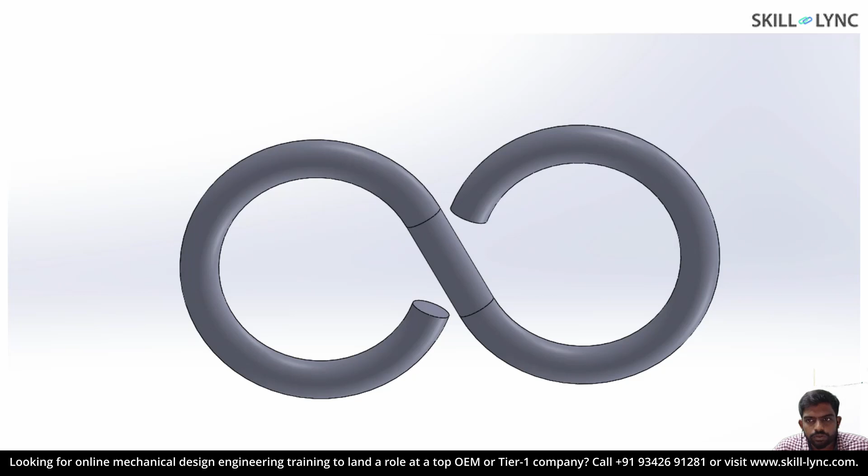So to perform the analysis, I have created a model for the S-hook, let's open it up in a separate window. Here in this model, in real life we fix this particular portion of the hook and bend the other section to enable the connecting member to slide into this part. This particular portion of the member is bent and rebent to accommodate the connecting member.

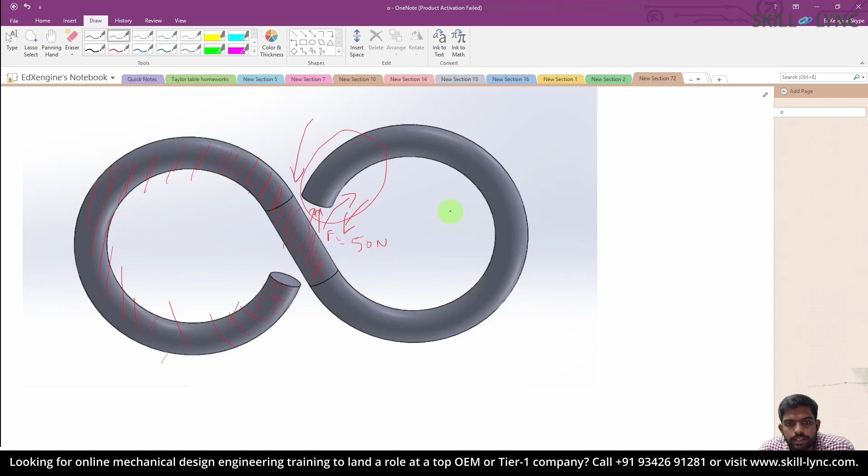We are going to apply the same load here, that is, I'm going to fix this region by a fixed geometry constraint, and after doing that I'm going to subject this particular portion of the member to a force of 50 newtons, apply the load, and predict the life of this part when subjected to 1500 cycles. So let's go back to the presentation.

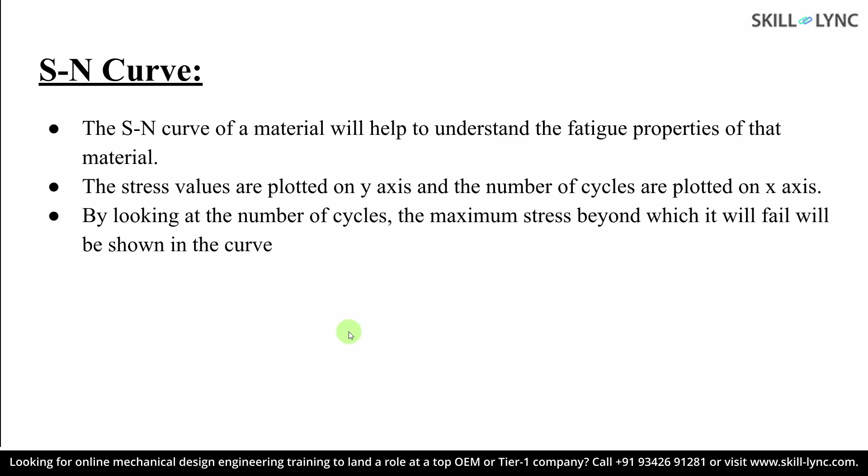Before we proceed with the fatigue analysis, let us understand the use of the SN curve in a fatigue analysis. The SN curve for any material gives us the relation between the maximum stress that a material can withstand before failure after being subjected to a number of cycles. Here the stress is plotted on the y-axis and the number of cycles is plotted on the x-axis.

As I mentioned before, we are looking at an SN curve. You can see the maximum stress value plotted in the y direction and the number of cycles plotted in the x direction. Let's say I have a material and I want to check the maximum stress it can take after 10,000 cycles. I just extend this point here and note the corresponding value for the maximum stress that can be allowed.

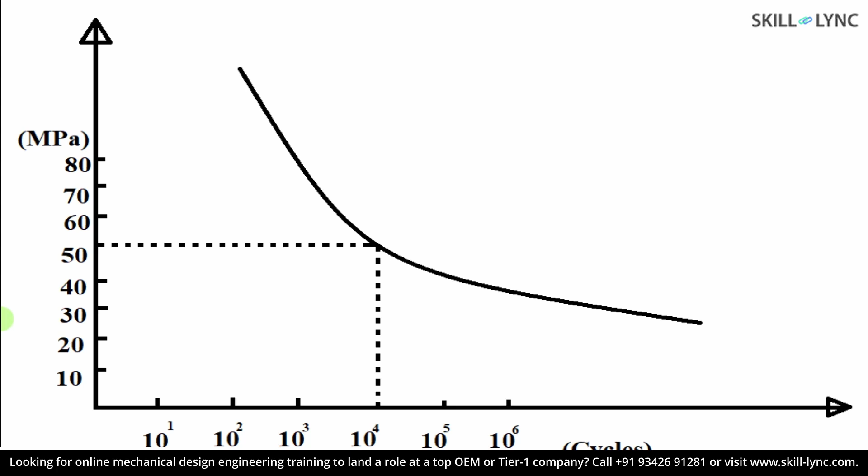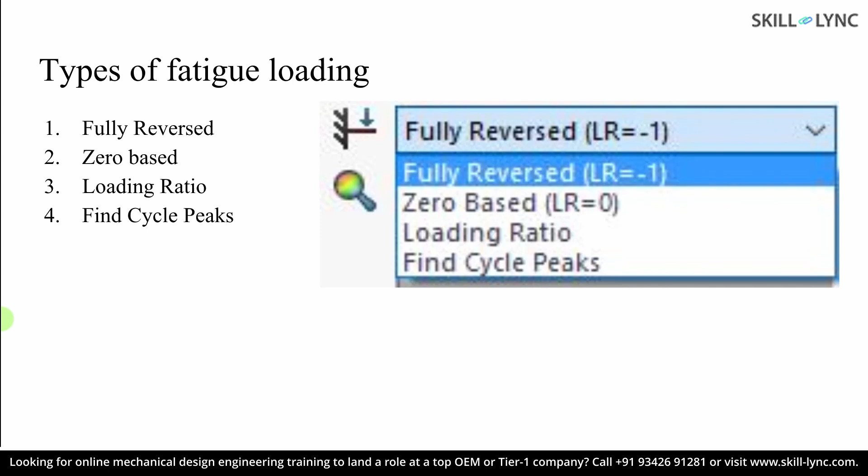Before you proceed with the fatigue analysis, you need to perform a static analysis on the part so that you understand the type of stress developed in your part, to predict its fatigue life. SolidWorks provides us with 4 types of loading: the first one is fully reversed, zero based, loading ratio, and finally find cycle peaks.

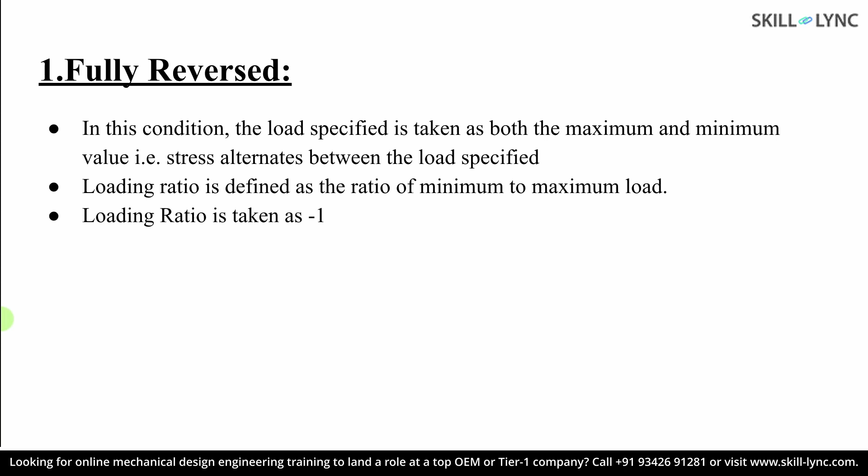Fully reversed: as the name suggests, the maximum and minimum load applied upon the material has the same magnitude except for variation in direction. Thus the loading ratio is taken as -1. If you look at the graph, we have subjected the material to a maximum load of 1000 and then go for a value of 1000 newtons in the other direction. A good example would be the S-hook we are going to analyze in SolidWorks.

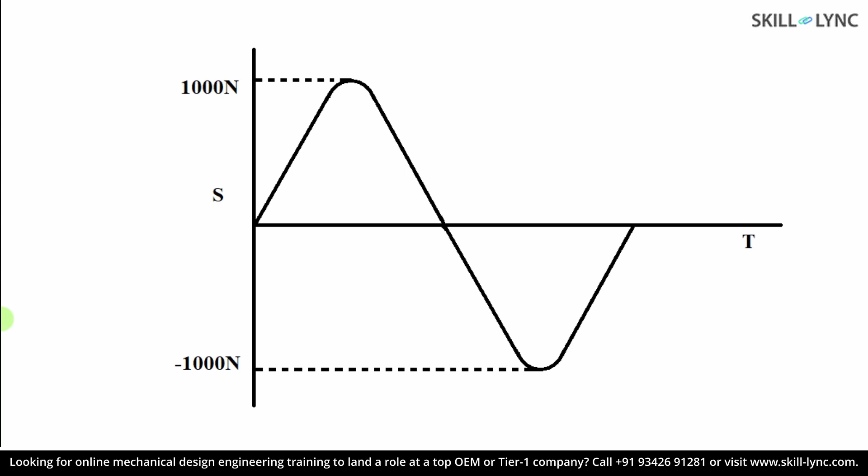If you apply 50 newtons to open the S-hook, you then apply another 50 newtons to close the S-hook. This way the magnitude of loading is the same while the direction is reversed. That is what is meant by fully reversed.

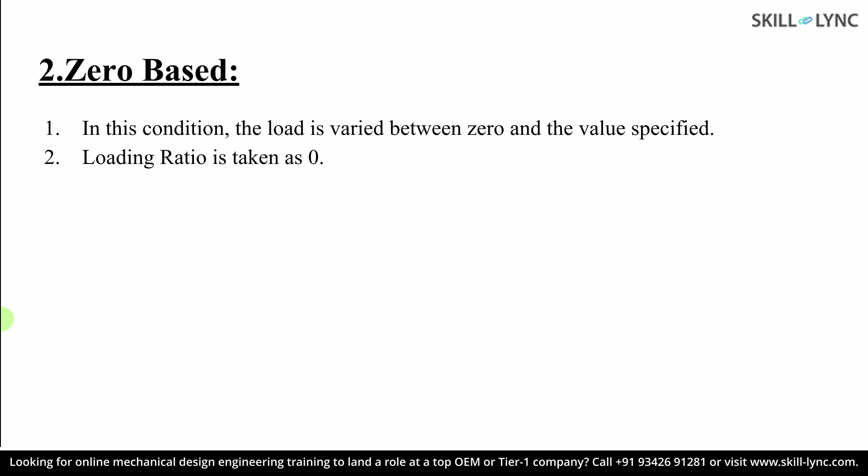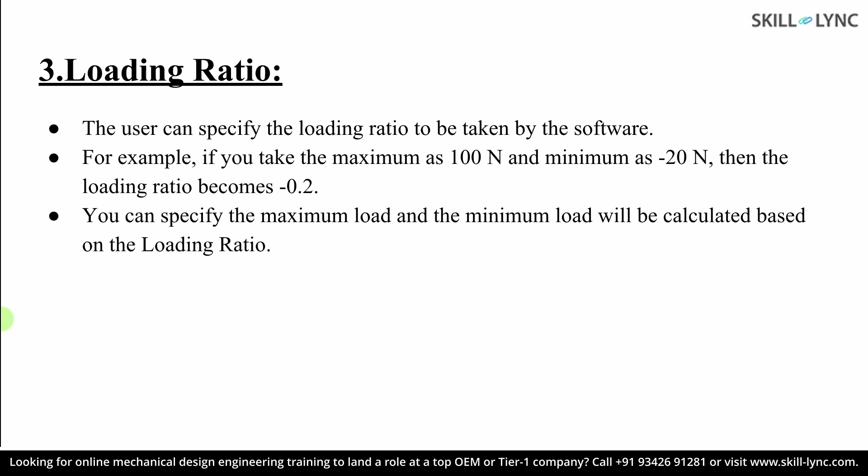Now the other type of loading in SolidWorks uses a loading ratio. Here you have a ratio between the maximum and minimum load applied. Once you give the maximum load and input the loading ratio, the software automatically detects the minimum value and proceeds with the simulation. The graph may look something like this, where the maximum value is here and the minimum value is not exactly the same in the opposite direction, but just offset a little bit down.

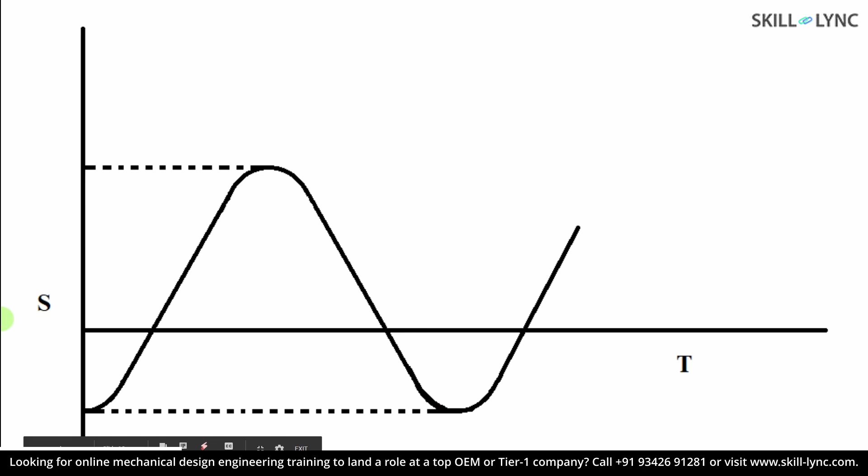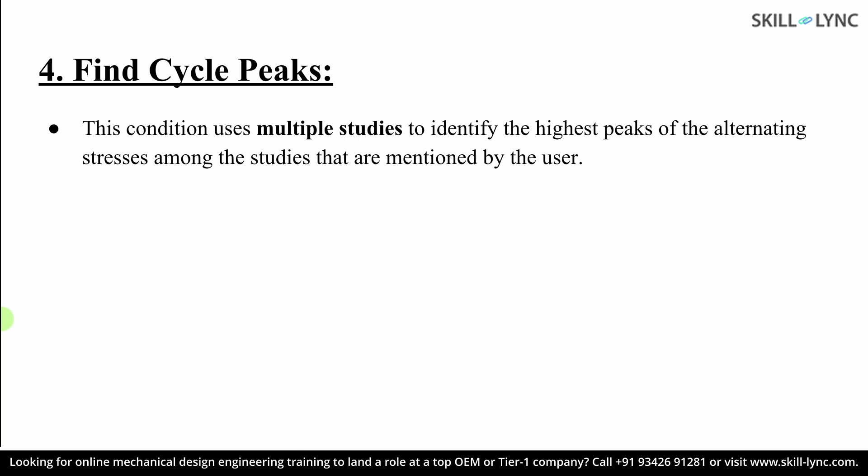So there is a loading ratio of some value between -1 to +1. Finally, we have find cycle peaks. Here SolidWorks provides an option to import the stress values from various simulations that you have already carried out on the part using the SolidWorks simulation module.

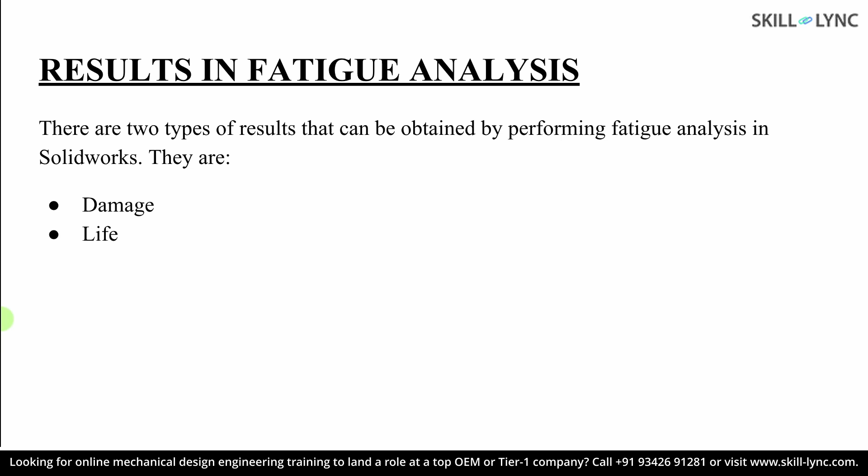Now let's look at the results that can be inferred from a fatigue analysis. The two types of results one can request are damage and life. First, the damage: from this result we can understand the percentage damage done to the material by exposing it to a given number of cycles. This value varies from 0 to 100 depending upon the damage caused.

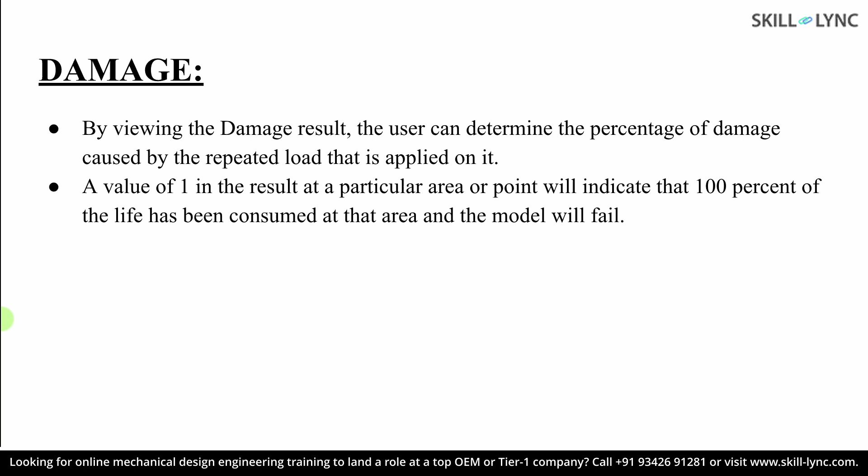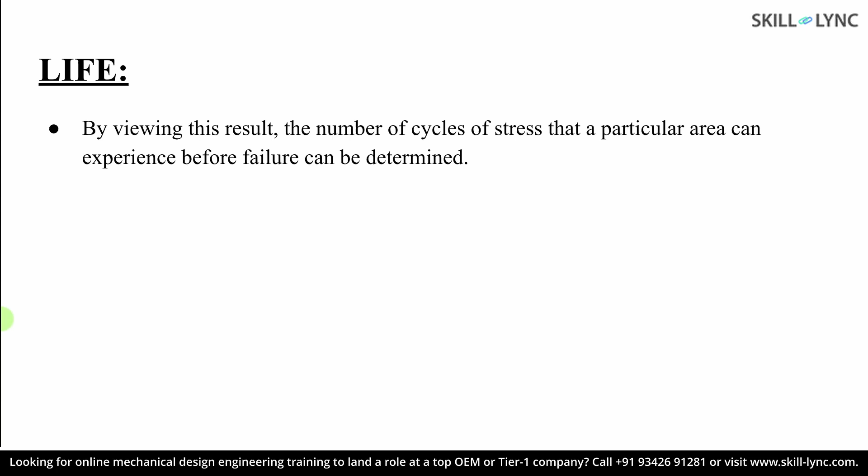Next, we have the life. This is defined in cycles, that is, the number of cycles the part or material can withstand before experiencing any failure. You will understand this better when we proceed with the simulation. So let's proceed with the simulation.

Import the model in SolidWorks and zoom, pan and rotate the geometry to check if the model is perfect. Once you do that, click on new study here. Before you proceed to perform a fatigue analysis, click on a static analysis, since the variation of stress can be studied only on a static analysis. Using the result from the static analysis, we can proceed to perform a fatigue analysis.

Now right click on the S hook and click on apply material. Choose other materials and select pure gold. Click apply.

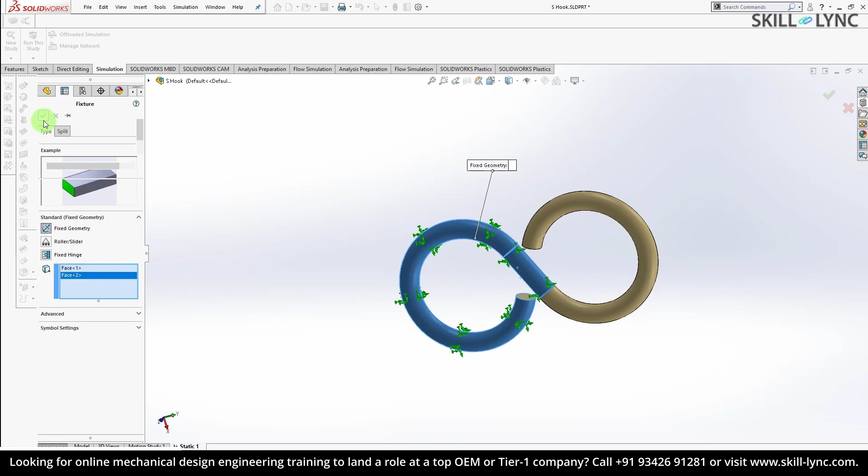Once you do that, right click on fixtures, click fixed geometry, and as we discussed previously, select these two faces and fix them. Now right click on loads, create a force on this particular face for a value of 50 newtons and click OK.

Let's use the default mesh and run the simulation. We can see we have obtained the results instantaneously. Just animate and look at the application of the loads.

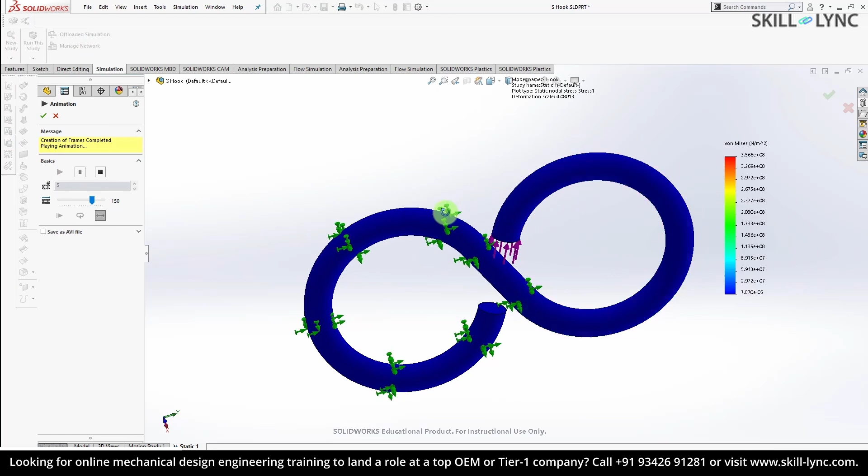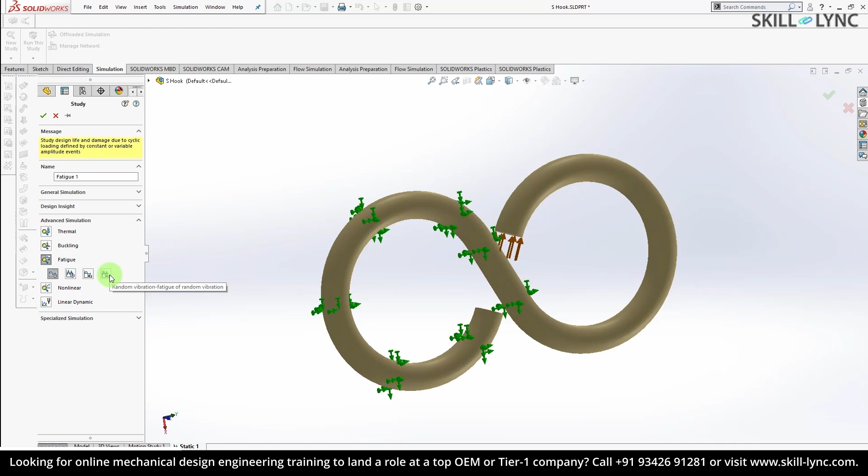Now that we have completed the static analysis, let's proceed with the fatigue analysis. Click on new study and select fatigue. Here you will be asked whether you want constant amplitude events with defined cycles, variable amplitude, harmonic fatigue, or random vibration. We'll be doing only fatigue analysis due to constant amplitude, and click OK.

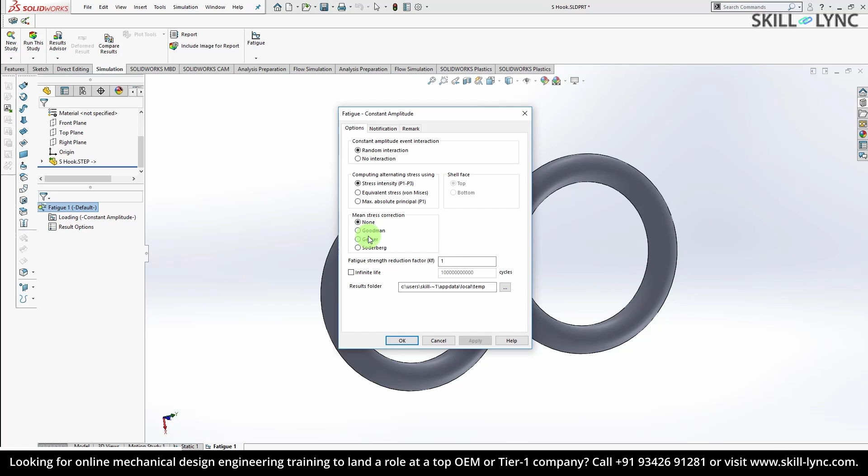Here right click on the fatigue and click on properties. From the properties of the simulation, you can select different settings depending upon your requirements. You have been given different failure theories which can be chosen to obtain the results, and right now we are not going to change anything, so click cancel.

Right click on the loading and click add event. Since we are going to apply a fully reversed kind of load, make sure you have the fully reversed option selected here. I'm going to check if this part will sustain 1500 cycles for a given load and click OK. Once we do this, we are all set to proceed with the simulation, but we haven't yet defined the SN curve for this simulation.

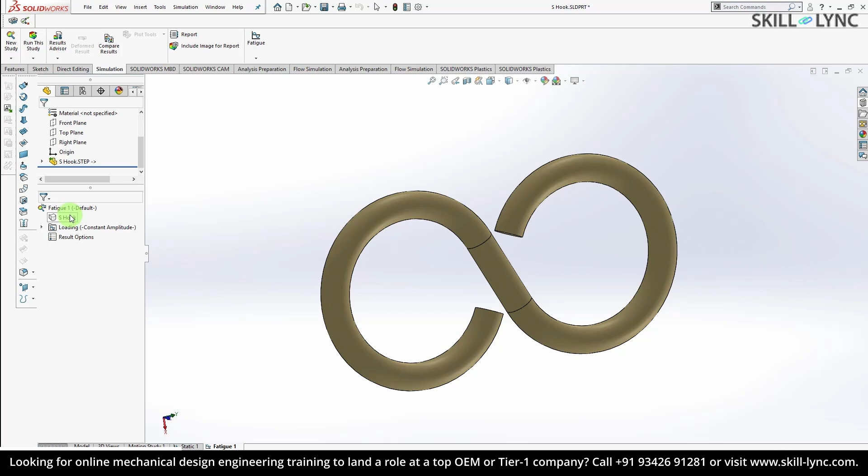So right click apply or edit fatigue data. We have an option to derive from the material elastic modulus. Select that and we have a table populated here. Click view to plot data in the SN curve. Here you have the number of cycles, and this is the maximum stress that is allowed. Click apply.

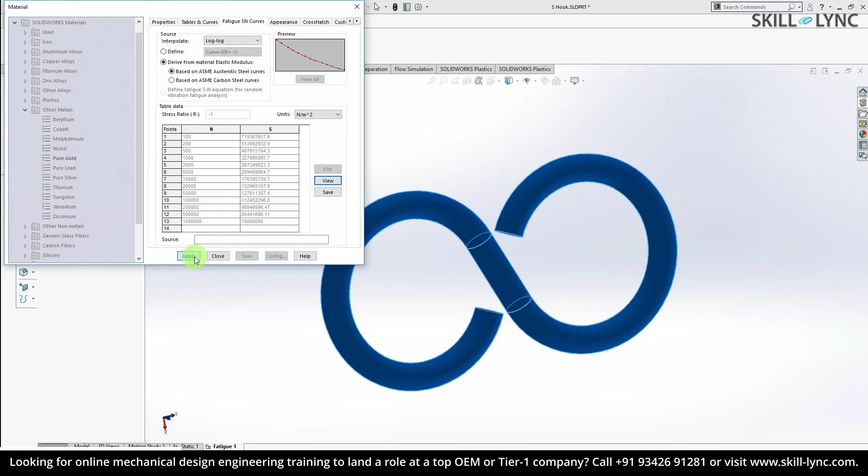We are now good to run the simulation. Let's run it here, and we have got the damage as well as the results in life. Before we could infer anything, right click on the legends, click chart options, and change the scientific notation to floating. Click OK. Now for the results, right click show.

Similarly right click, do chart options and change it to floating. Click OK. So first let's have a look at the damage.

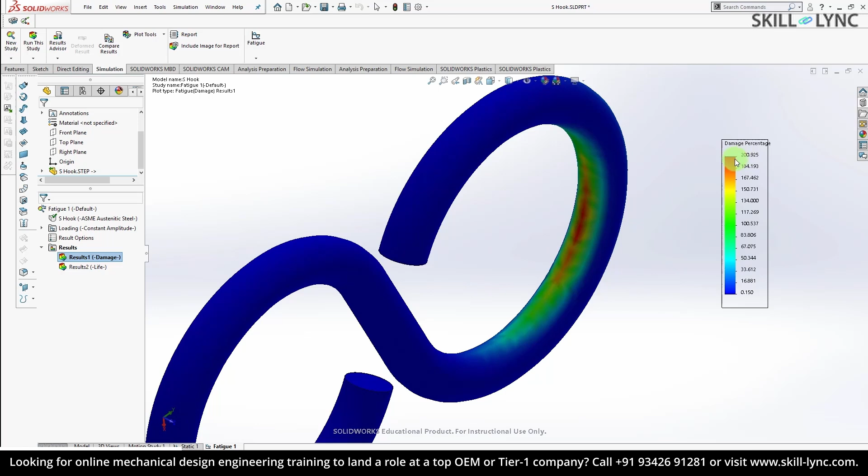Here you can see the portion colored red. There has been maximum damage percentage of 200, while on the other side of the bending we have a maximum damage of 50%.

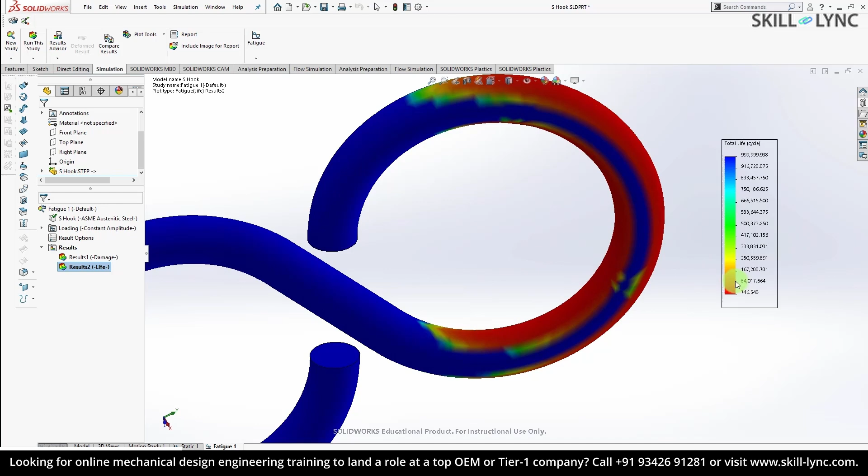Let's look at the life now. We wanted to check if this particular part would sustain 1500 cycles, but since most of the portion colored red is going to fail within 746 cycles, this part will not sustain 1500 cycles without failure. So we need to either change the material or improve the design by adding some more thickness to the part. Now we have successfully completed a fatigue analysis on this S hook.